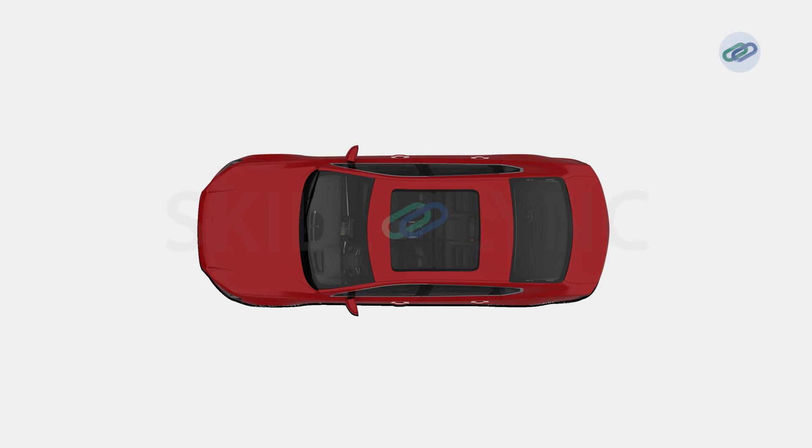Over the course of this series, we've comprehensively explored AUTOSAR, from its very basics in architecture, to its evolution from classic to adaptive AUTOSAR. We've also uncovered how AUTOSAR is vital for fueling the software-driven revolution in the automotive space, with the emergence of electric and autonomous technologies. In this video, we'll take a look at the pressing need for engineers to upskill in AUTOSAR to stay competitive and relevant in the rapidly evolving automotive industry.

As vehicles continue to incorporate advanced technologies like autonomous driving and connectivity, expertise in AUTOSAR has become crucial for developing safe, efficient, and innovative automotive software. Upskilling in AUTOSAR not only opens up new career opportunities, but also enables engineers to contribute effectively to cutting-edge automotive projects, keeping them at the forefront of industry advancements. It also enhances an engineer's ability to adapt to changing industry standards and technological shifts, ensuring long-term professional success and job security in the automotive sector.

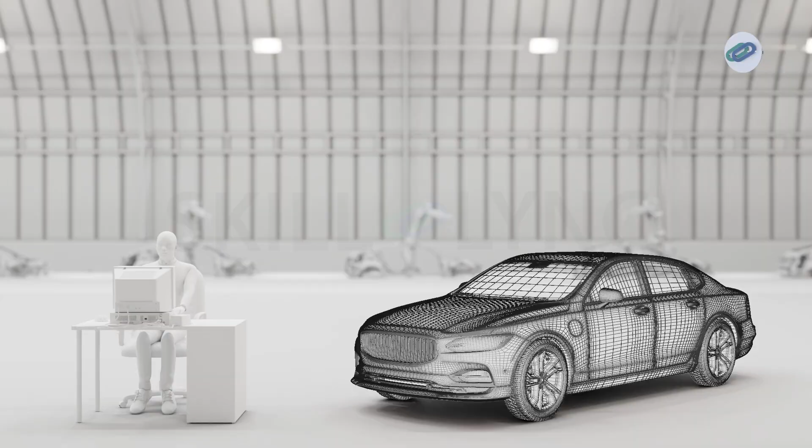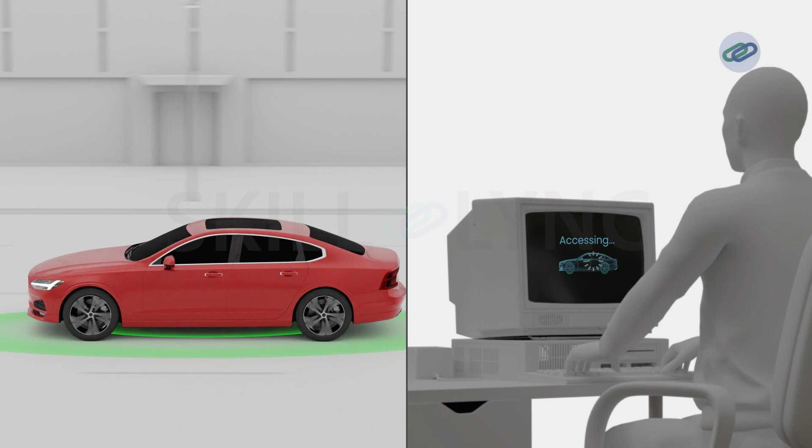The job market for skilled AUTOSAR engineers is robust and growing due to several key factors. First, the automotive industry is increasingly relying on embedded software to power advanced features like ADAS, autonomous driving, and connectivity, creating high demand for engineers with AUTOSAR expertise to develop and maintain these systems. Second, as vehicles become more complex and software-intensive, there is a pressing need for professionals who can ensure the security and efficiency of automotive software without compromising on safety.

Adding on to this, AUTOSAR is a globally recognized standard, which means that engineers with proficiency in this framework automatically become valuable assets for automotive companies. With the right set of upskilled engineers, companies can meet international regulatory requirements and compete in the global market.

Engineers with demonstrated expertise in AUTOSAR are in high demand. This expertise can lead to career advancement, including promotions and leadership roles, as companies seek skilled professionals to lead AUTOSAR-based projects. Moreover, upskilled AUTOSAR engineers are better equipped to adapt to evolving industry standards and technology trends, reducing the risk of job displacement and ensuring long-term job security.

Now the question arises: how can you upskill yourself in AUTOSAR? Learn the basics. For starters, you can begin by gaining a strong understanding of AUTOSAR's architecture, concepts, and terminology. This can be done by studying introductory materials, reading AUTOSAR documentation, and exploring online resources dedicated to AUTOSAR fundamentals.

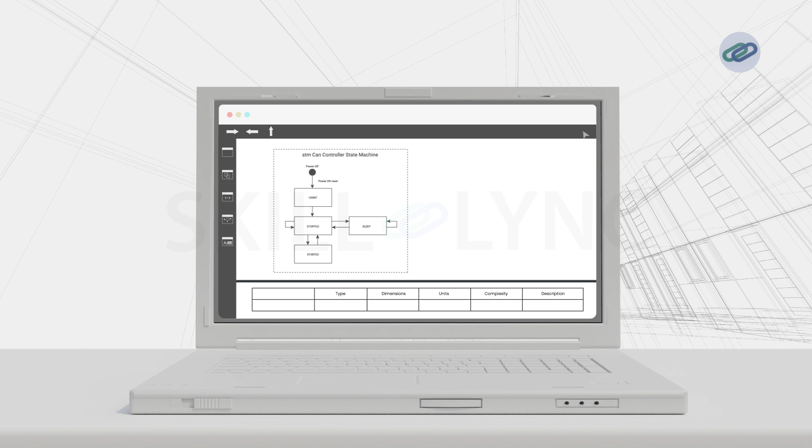Hands-on experience. Next comes hands-on experience. You can actively seek out opportunities to work on AUTOSAR-based projects, whether within your current job or personal projects. Hands-on experience is considered one of the most effective ways to widen your knowledge and understanding.

Formal training programs. You may also consider enrolling in formal training programs or workshops that focus on AUTOSAR. Specific tool vendors and training institutions provide in-depth knowledge and hands-on practice on all there is to know about AUTOSAR.

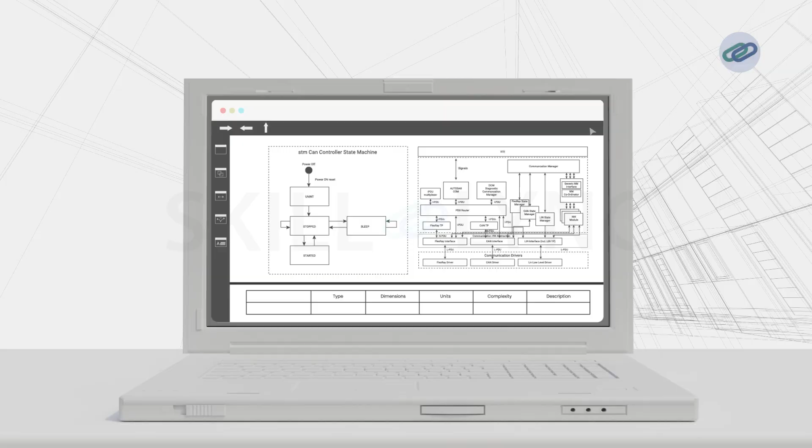Online resources. Leveraging online tutorials, forums, and communities dedicated to AUTOSAR is another option. This lets you participate in discussions, ask questions, and share knowledge with others in the field. With this mode of learning, you'll get to work through problems yourself, as well as pace the speed at which you learn.

Documentation and standards. It's important to familiarize yourself with AUTOSAR documentation and standards. Explore official AUTOSAR specifications and guidelines, as they serve as crucial references for AUTOSAR development.

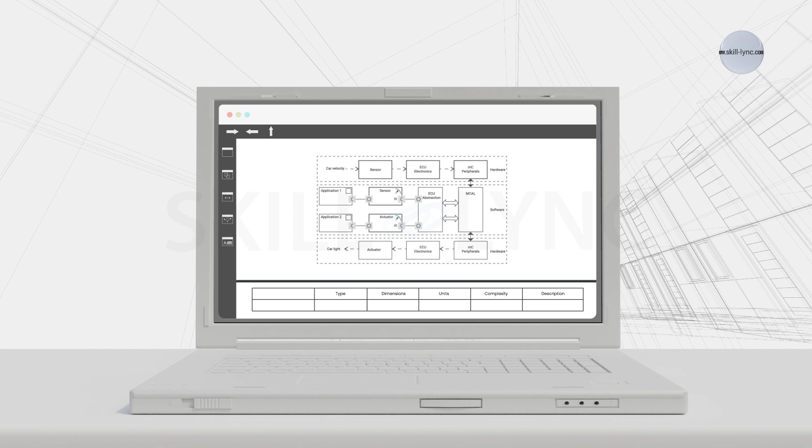Tool familiarity. You can also get comfortable with the software tools commonly used in AUTOSAR development, such as configuration tools, code generators, and debugging tools. Practice using these tools in real-world scenarios to enhance your proficiency.

Collaboration and mentorship. Another effective mode of upskilling is collaborating with colleagues and peers who have AUTOSAR experience. Learning from others and seeking mentorship can accelerate your understanding and provide valuable insights.

Continuous learning. AUTOSAR, like many technology domains, is continually evolving. Staying updated with the latest developments, new features, and updates to the AUTOSAR standard is therefore important. This can be done by regularly reading industry news and attending relevant webinars or conferences.

Certifications. You may also consider pursuing AUTOSAR-related certifications or courses that offer certificates. These certifications can validate your expertise and make you more competitive in the job market.

By following these practical steps, engineers can systematically upskill in AUTOSAR, becoming proficient in this critical framework for automotive software development. This expertise is not limited to just their careers, but also extends to the continued success and innovation of the automotive industry.

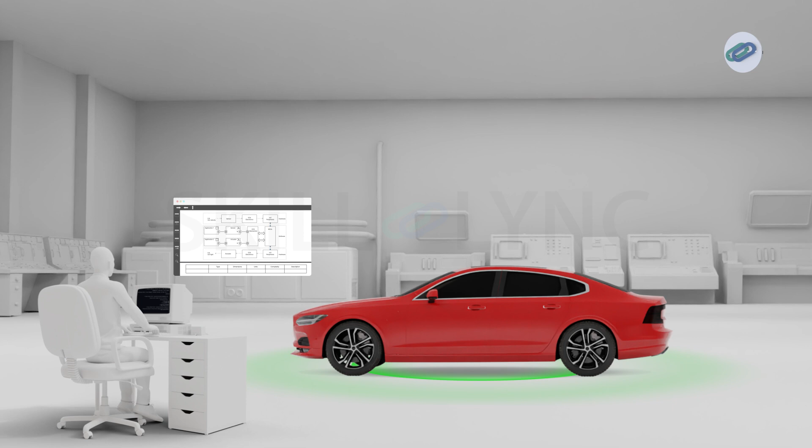Over the years, engineers with the right skills in AUTOSAR have played a central role in facilitating the development of cutting-edge automotive software technologies. They have leveraged their AUTOSAR knowledge to make the process of software integration into vehicles streamlined and seamless for maximum compatibility and reliability.

For instance, in the popular Advanced Driver Assistance Systems division, AUTOSAR-savvy engineers have effectively designed software architectures that enable seamless interaction between sensors, control systems, and vehicle components. Similarly, in connected cars and autonomous driving, AUTOSAR experts have harnessed the framework's modularity to efficiently integrate infotainment systems, over-the-air updates, and complex autonomous driving software stacks.

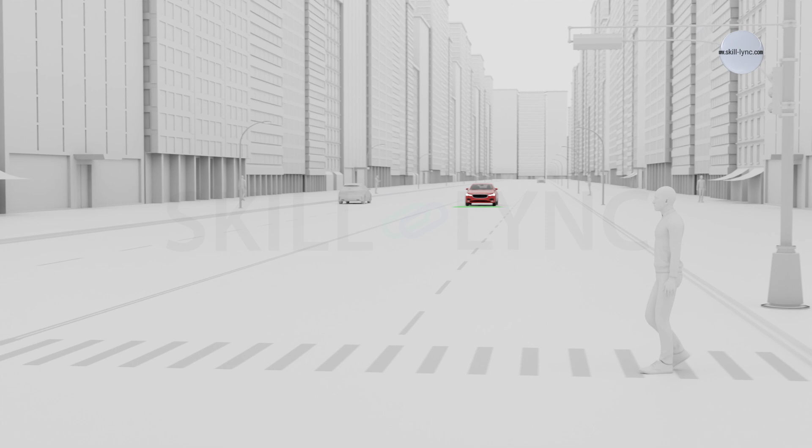This expertise has paved the way for innovations that are shaping the future of the automotive industry, making vehicles smarter, safer, and more efficient. It's evident that with AUTOSAR, automakers and suppliers keep in line with the industry's rapid evolution, ensuring that vehicles are not only safe and reliable, but also equipped with the innovative features and functionalities demanded by today's consumers.

With more advancements in software technologies, there's never been a more compelling time to upskill in AUTOSAR. By acquiring expertise in this critical framework, you're not just staying relevant, you're positioning yourself as a valuable asset to the industry's future. The demand for skilled AUTOSAR engineers is soaring, and this expertise opens doors to exciting career opportunities and job security in a dynamic field.

Getting hands-on AUTOSAR expertise will have you shaping the future of mobility, as well as being a driving force behind safer, smarter, and more connected vehicles. Take the step today to put yourself at the forefront of automotive excellence.